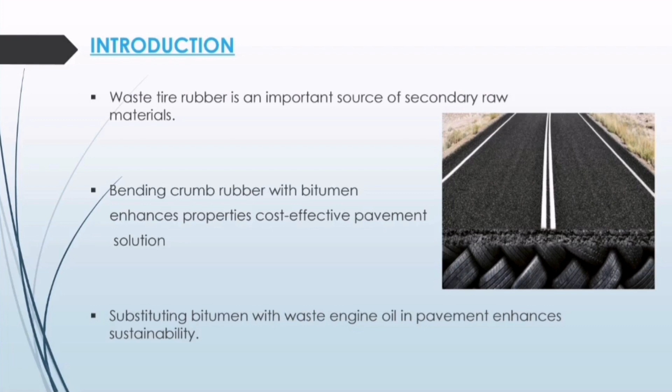Introduction. Waste tire rubber and engine oil offer sustainable solutions for asphalt pavements, enhancing properties while addressing environmental concerns. However, recycled aggregate and admixtures contribute to pollution, requiring attention to environmental issues.

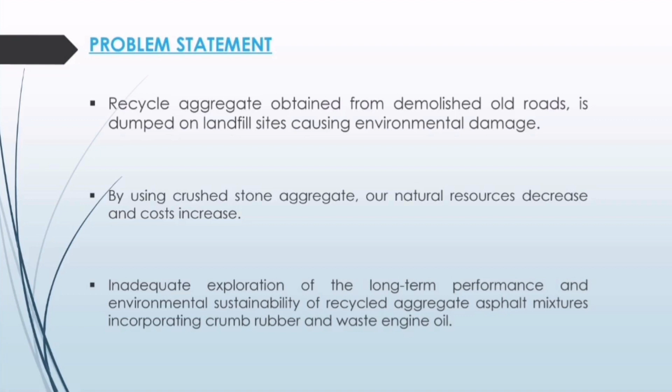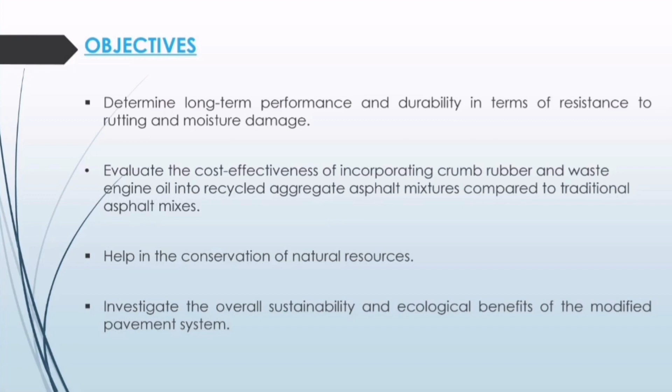Objectives. Assess long-term performance and durability, focusing on cracking, rutting, and moisture damage. Evaluate economic feasibility compared to traditional asphalt mixtures. Contribute to natural resource conservation and overall sustainability.

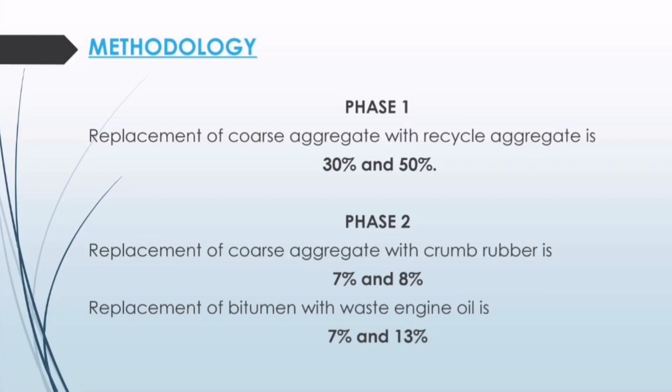Methodology. Replace coarse aggregate with recycled aggregate, 30% and 50%. Incorporate crumb rubber, 7% and 8%, and waste engine oil, 7% and 13%, into the mix. Conduct various tests to evaluate stability, density, rutting, and other properties.

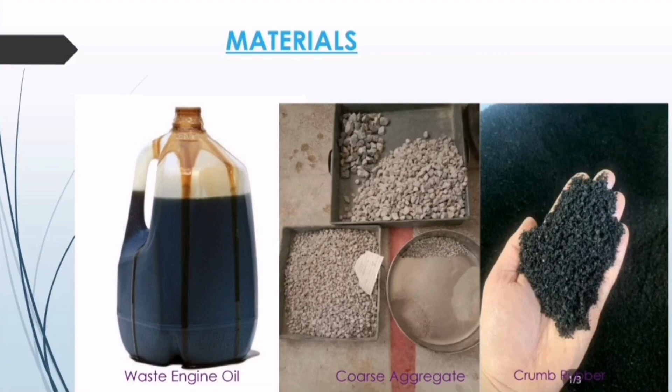Materials used in the project: aggregate, waste engine oil, crumb rubber, bitumen, and methylene chloride to clean and recycle asphalt pavement. Mix proportions and quantities of materials were determined.

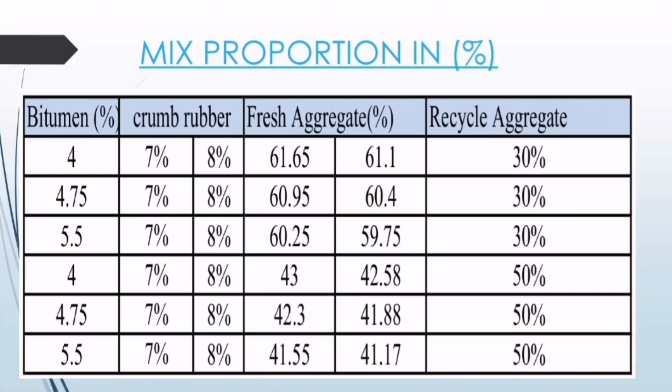We use crumb rubber for 7% and 8% of the aggregate. The percentage of fresh aggregate is 50% and 70%, and recycled aggregate is 30% and 50%.

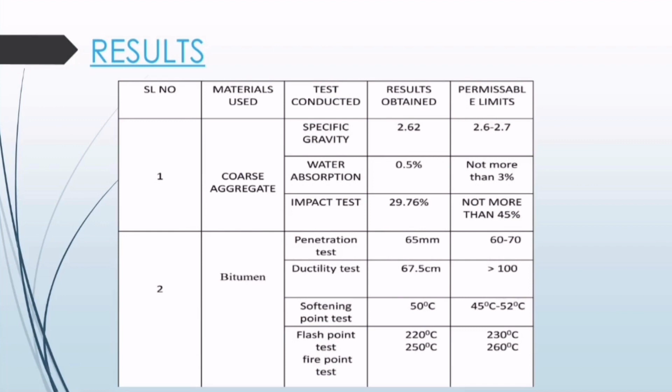Results. Crumb rubber enhances bitumen properties but reduces ductility. Optimal bitumen content identified as 4.75% for penetration grade 60/70.

A sample with 7% crumb rubber, 7% WEO, and 50% recycled aggregate had a maximum rutting of 11.89, while one with 8% crumb rubber, 7% WEO, and 50% recycled aggregate had a minimum rutting of 4.87.

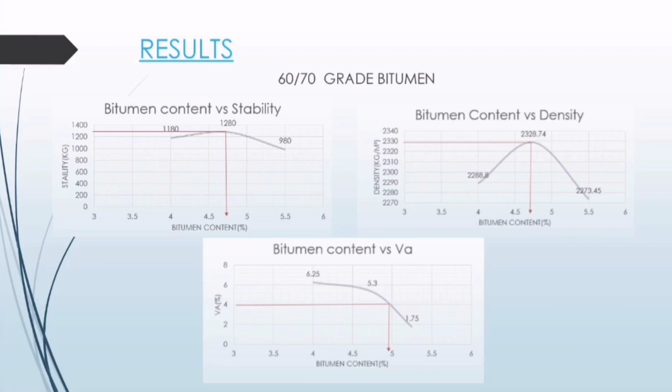Conclusion. Bitumen properties like softening point, flash point, and fire point rise with crumb rubber addition. The optimum bitumen dosage is 4.76% based on performance grade 60/70.

In wheel tracker tests, 7% crumb rubber, 7% WEO, and 50% recycled aggregate resulted in max rutting of 11.89, while 8% crumb rubber, 7% WEO, and 50% recycled aggregate showed min rutting of 4.87.

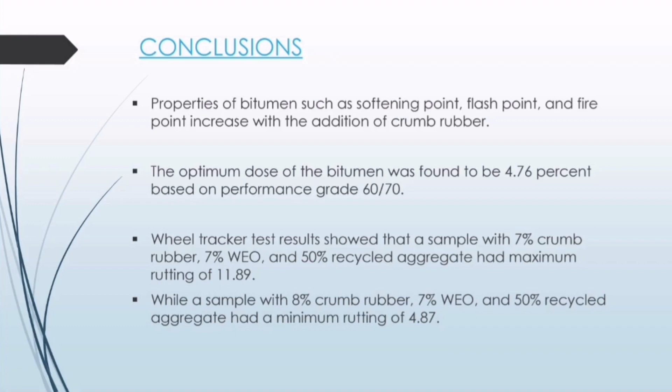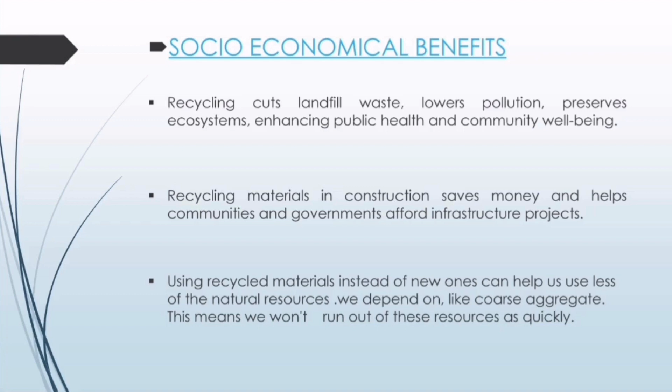Socioeconomic benefits. Utilizing recycled aggregate reduces dependency on traditional coarse aggregate, preserving resources. Recycling minimizes landfill waste, pollution, and ecosystem degradation, promoting public health and community well-being. Incorporating recycled materials reduces construction costs, enhancing economic viability.